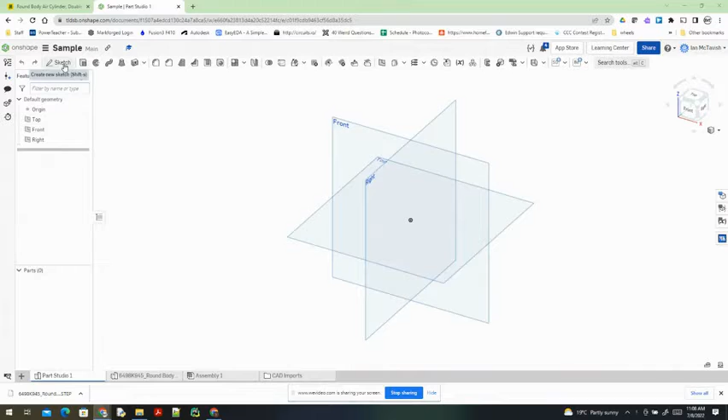So this is just a quick video to show you how to use some feature scripts. So if I'm going to create a sketch here, I'll just select the top plane.

Center point rectangle, and to normalize my view. So let's just say I've got a square here, 4 inches by 4 inches. And I am just going to extrude that to be 1/8 of an inch.

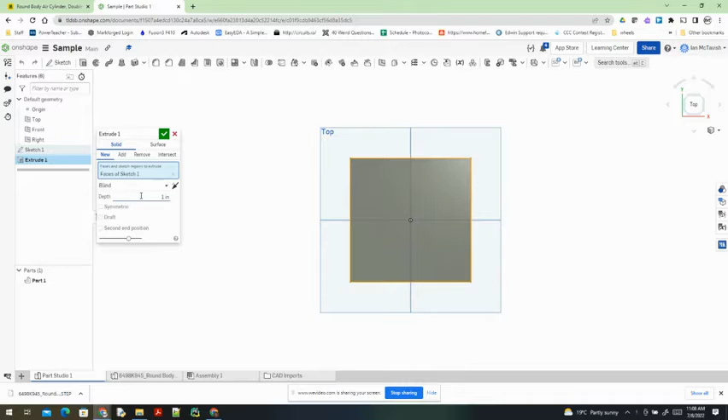So I'm going to make a little thing in plywood to test something out. So this one I'm going to sketch in the top as well. And I'm just going to do a corner rectangle, again, and normalize my view.

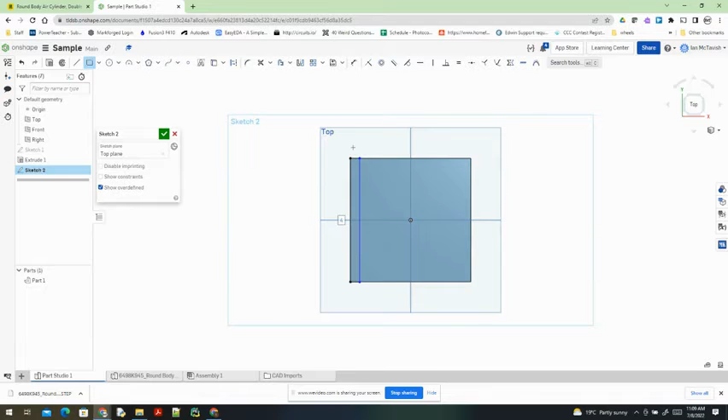And I'll set that to be 1/8, and I'm just going to extrude that. And I'm going to create a new one, 4 inches, just like that.

And if I mirror that part along that plane, I should have a second one. Everything fits.

So let's just edit that quickly, make sure that it's new. Okay, so I have 3 parts.

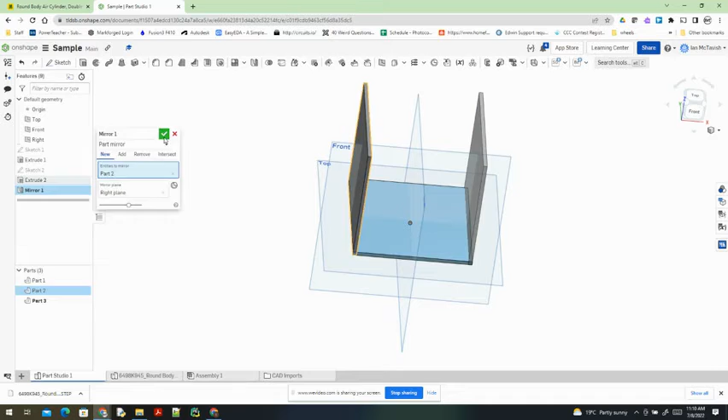Now, within the feature scripts, you can add a custom feature, and you just search for laser joint. You should be able to find this, and you can see there's a lot of copies and stuff, so you want to find the right one. So I have already found it. So I got a few in here. So there's my laser joint.

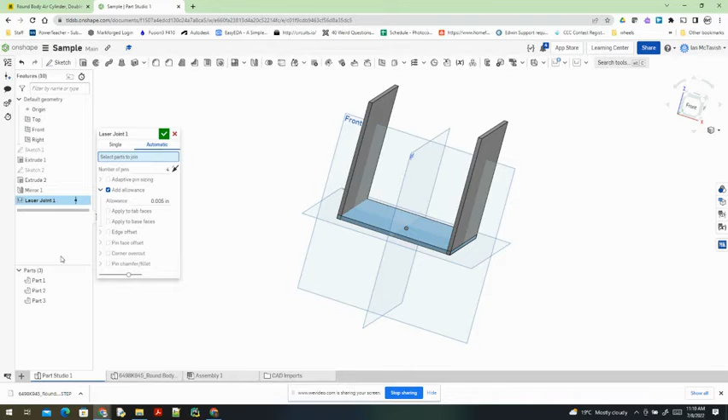So there's a couple options here. I can do single or I can do automatic. I'm going to do the automatic. I just select the 3 parts, and I select how many pins there are. So by selecting 4 pins, that's the result. If I change that to 3, it reduces it. I always add an allowance, and I found 0.005 seems to work really well.

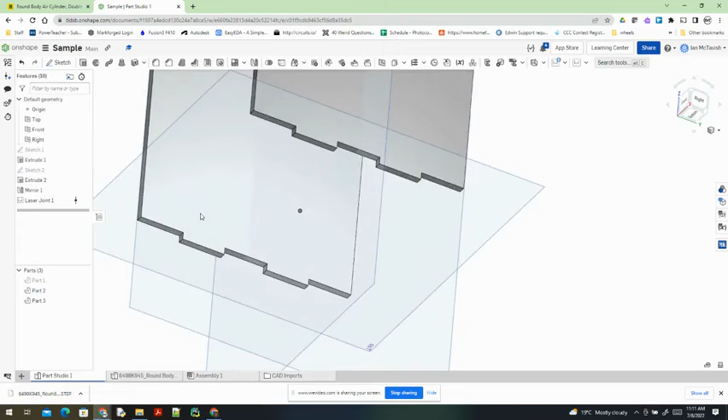So if I do that, just like that, you can see I've got parts that are laser jointed. So that's really, really handy. If you're doing a box, it works really well. I've often done it with a box with walls on the inside.

I do prefer walls on the inside to have like a slot, so that the top piece has a slot here and the bottom piece has a slot there, so they just slide onto each other. But doing the exterior walls with finger joints works really well.

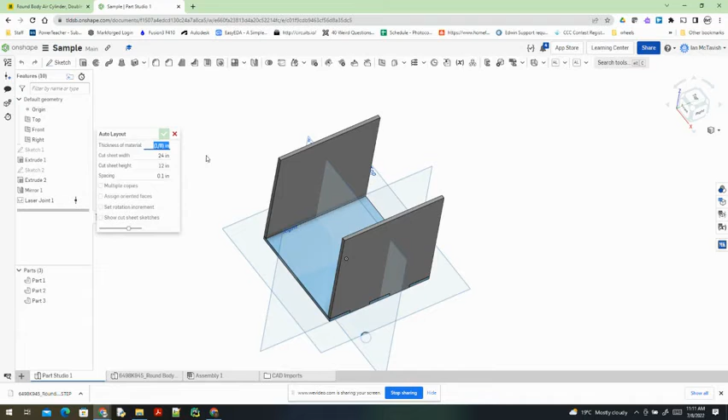Okay, so now that I have that done, I have another feature script, and again, you can add them. It's called Auto Layout, and this is where I can select. Our laser cutter has 24 inches by 12 inches, and I don't need much spacing. But if I was to do this on the CNC router, I could change that to a much bigger spacing.

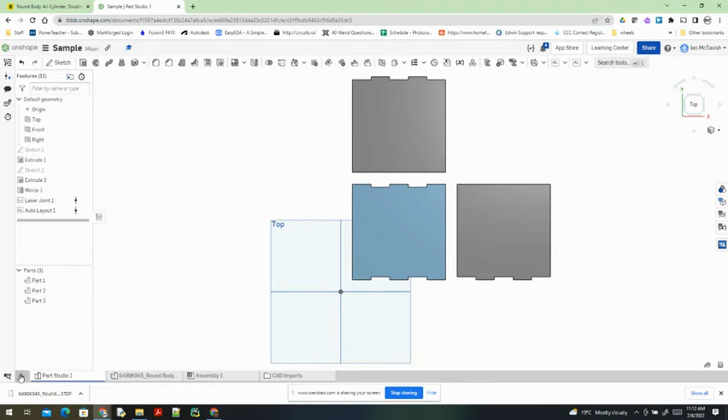And just like that, I now have a spacing set up, and I can take that part studio. If I take the 3 parts, I'll just create an assembly from them.

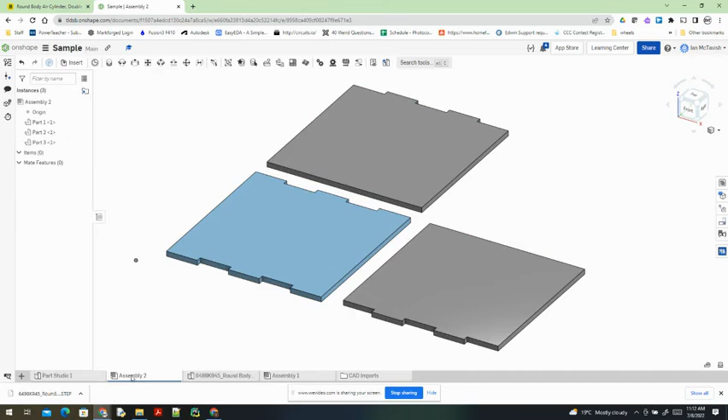There we go. And what I can now do is create a drawing from this. I've set up a laser cutting template, but you could just use one of these. My template, I'll show you that very quickly here, has one view, it has a top view. And I want to make sure my scale is 1:1 and it's top view.

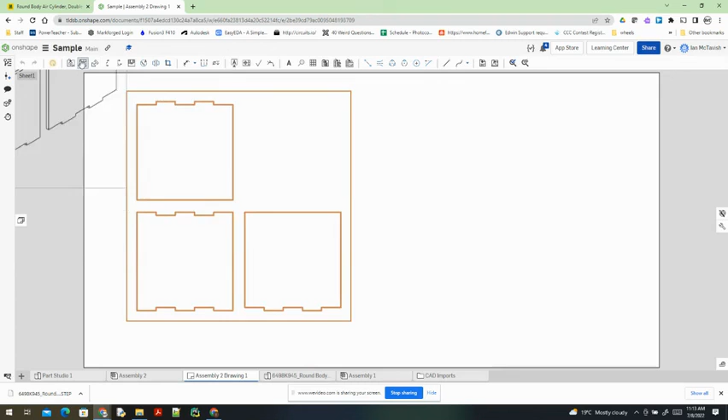And I can just place this on. But the reason with my template is it's the same dimensions as my laser cutter, 24 inches by 12 inches. It sets the color to red, so I do need to go in and change the width of these lines in either Illustrator or Inkscape to be able to cut them. But that's not a big deal, and everything's laid out.